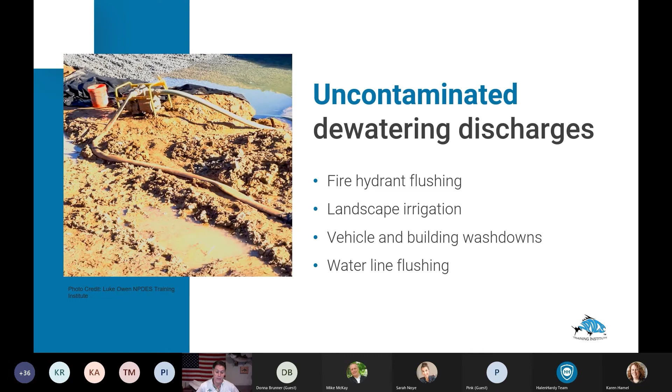So when you're flushing and when you're getting rid of that water, you need to actually make sure it is being discharged as clean water from the necessary point of discharge from that construction site. Okay, go ahead to the next slide. Thanks. Here, identify activities that create uncontaminated discharges, eliminate the detergents that might be there, use dewatering devices to capture sediment pollutants. So that's kind of a good how for sure.

Eliminating detergents. I know before I got into this stuff years ago, I had no idea that me washing my car out there on the street and putting detergent, essentially suds, in the local creek through a storm drain was a problem, but it is a serious problem. Detergents can really kill fish. And so the EPA wanted to make sure that that's specifically identified.

The next clarification that they made for the permittees are modifications to your NOI. NOI is your notice of intent, and this is basically your notification to your regulating authority saying, okay, this is what we intend to do. These are the things that we're going to do within the scope of this permit while we are in that construction phase. And there are a lot of things that we may overlook when we make changes within our facility that the EPA does need to be made aware of.

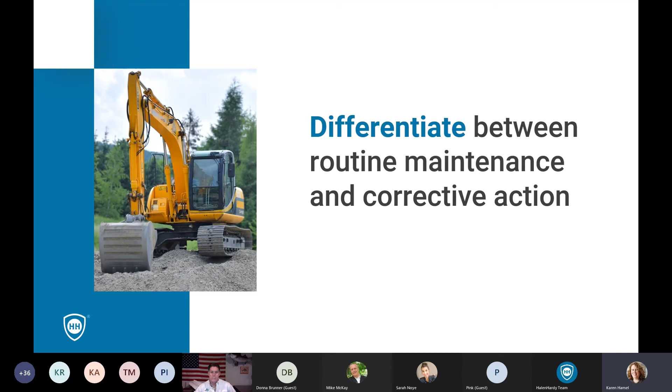And other things that we might do, trimming shrubs, or if we need to clear hedges back on a lawn, taking care of those things that we might do every day. Think about things that we would do after a construction site has been done. Those might also be activities that we would consider routine maintenance. And they're things that, as I mentioned, probably come up on an inspection and you note that something needs to be done. The EPA is also clear within this permit that routine maintenance tasks are things that traditionally take less than 24 hours to complete. So these shouldn't involve any kind of major reconstruction. You shouldn't be digging out land in order to make a routine maintenance task happen.

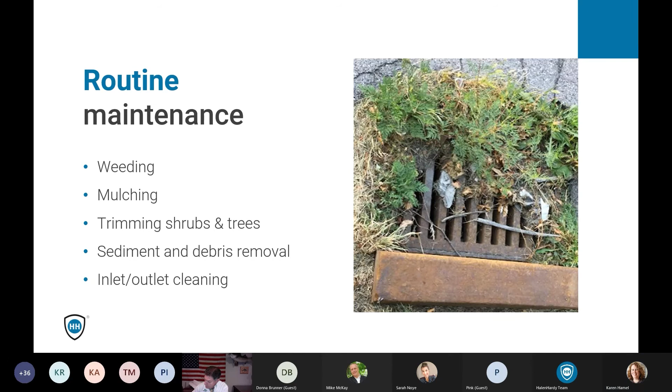And corrective actions, in converse to that, again, these are things that we're probably going to identify within the scope of an inspection, but they're things that are going to take longer to complete. So if you need to replace a perimeter barrier, if you need to maybe create a new stormwater basin, or you need to do something that is going to help prevent a discharge of any kind of a pollutant, but it's not necessarily a thing that you're going to be doing again and again, that may take you into a corrective action.

And the difference in these two is important because if you're doing routine maintenance, that's not something that you need to note on your permit. You don't need to keep a log of it. But if you are doing corrective actions, they do need to be noted in your corrections log. And that is something that you may need to update your SWPPP to reflect.

So kind of keep those things in mind and have those things within the scope of the inspectors so that they do realize those things, and if they are corrective actions, they do get logged and they do get updated within your SWPPP if they need to be.

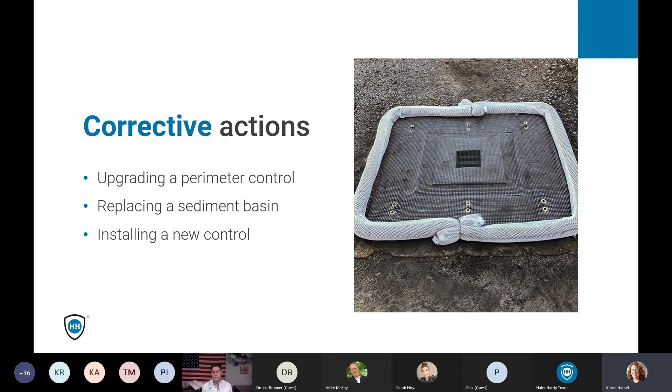So things that you can do there is, after an inspection, if you assign job tasks, put the start and end times on them so that you can verify that it is a maintenance task. It is taking less than 24 hours. Verify that tasks don't keep occurring.

So for example, maybe if you've got a barrier fence at the end of your lot and you're replacing that every week because on inspections you see that it's eroding, maybe that's no longer maintenance. Maybe that is something that you need to correct. Look for the reason why it's flooding out in that area or something, and do that corrective action once so that you're not maintaining it again and again and again every week.

And develop those processes so that when those corrective actions do happen, you do have that check and balance. Maybe you need to update inspection forms as well, but you do have those things in check so that routine maintenance and corrective actions are differentiated within your permit.

And the next item is designing your stormwater controls based on recent precipitation data. We have been going through a lot of different weather patterns, things that some of us haven't seen in a lifetime. We've seen those 100-year storms being updated more frequently. So this can affect a lot of what we're doing with our stormwater permitting.

If we're used to an area that maybe is a little more arid and storms don't come through a lot, and now suddenly we're starting to see that precipitation happening more often, or maybe the opposite is happening. Whatever those things happen to be, we need to look at that most recent data so that we are designing those stormwater controls appropriately, so that we've got a basin in place that's capable of holding everything that could come its way, so that we don't have those perimeter barriers being washed out, so that we do have all those checks and balances in place for that worst case scenario that could happen.

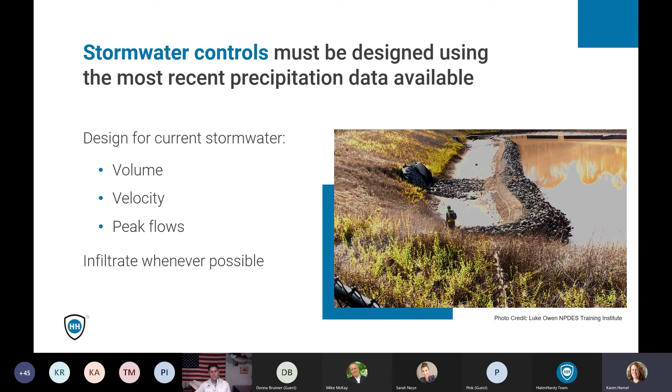And also with this, they made a point to look for ways to infiltrate water whenever possible. And that just means putting it back onto the land so that we don't have as much discharge going out, so that those areas do become more saturated with water when they need to be, and we don't have the problems associated with all of that water leaving the construction site. Some different ways to do that.

NOAA has a lot of great resources on their site, and you can actually put in your zip code to determine what your historic data is. I believe they go back close to 100 years, maybe even a little more, but they've got all of that data in place so that you can see, here's what's happened in the past 100 years in this specific zip code. So here's what I need to look for. Here's how big I need to plan that basin. Here's how big I need that secondary containment area.

Whatever that stat may be, you've got the information that you need specific to your location to make sure that everything is sized properly. And if you do need to update your plans and procedures, you've got that information to do it properly, so that as you're working with your engineering companies or your consultants, everybody kind of has the same information to play with, so that the plans do reflect reality, and so that you don't have the discharges associated with those big storm events.

And Luke, back to you.

Okay, thank you. Something to keep in mind as we're going through all of this is that around the country, wherever you're at, you have different types of rain events, snow events, things like that. Where I live right now in Georgia, we've been getting about 65 to 85 inches of rain a year. That's a lot of water hitting the ground. And a 1-inch rain event on 1 acre is equivalent to 27,154 gallons of water. So just with a 1-inch rain event.

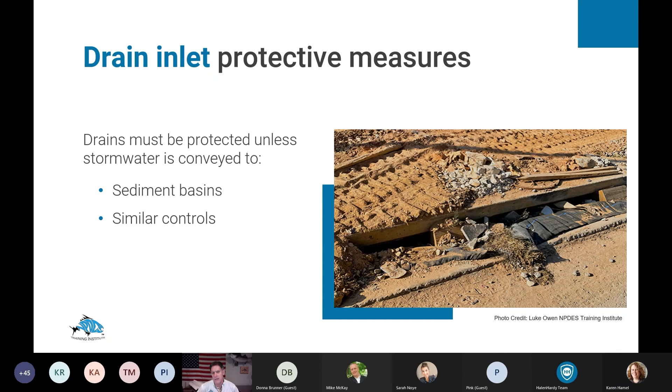So how do you do that? You identify the drains, guard the drains that don't lead to retention areas, filtration media, oil water separators if necessary. Again, oil water separators are kind of unlikely depending on the type of project or construction job you're on. But here we have a kind of a storm drain inlet that's not really for sediment. That's a post-construction sediment trap. But we have, of course, all different measures.

And every state and the feds have their own BMP guidance documents that they go to. Again, just like Karen said, the EPA is not going to recommend a specific vendor, but there are technologies that different types of vendors make for guarding storm drains. Some better than others. For inlet protection and excavated inlet protection, you're going to use different measures than you would after that pavement's poured and you've got storm drains still adjacent to open lots. So you're going to use maybe filter socks, stuff like that. So just use the appropriate BMP.

And to underscore all of this, the SWPPP, as well as the permit, are what I refer to as the Bible. You've got to do what's on them. Now, the difference between the SWPPP and the NPDES permit is this. The SWPPP has to change. It has to adjust to the challenges that site sees. So, for example, if you're getting moderate rain events and the existing BMPs are working and they match what's on the design, perfect. It's great. But when you get hammered by a great big, maybe a 3 or 4 inch rain that's still within the design capacity of that plan, you've got to change that plan to match the BMPs in the field.

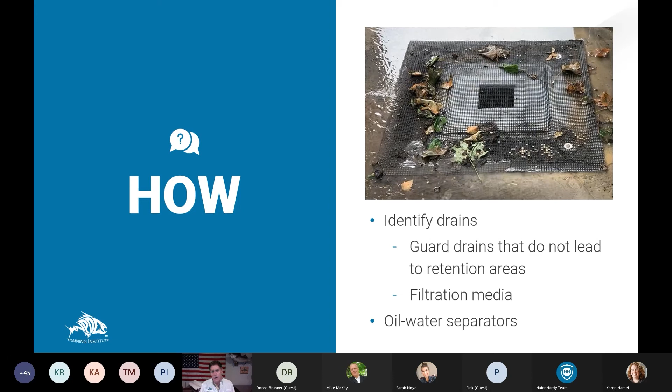And many times it takes the design professional, that professional engineer, maybe a CPESC, a certified professional in erosion and sediment control, that stamped those plans to make sure that they match what's in the field. Make sure you do that. It's a pain in the butt, but I guarantee you it is well worth your time to do that. Okay, next slide.

All right, inspections in arid and semi-arid areas. Okay, once per month and after rain events. The seasonally dry period locator tool, Karen mentioned that earlier. It's a great tool. It's super simple. It's an Excel file. You download it. You type in your state, and it'll tell you the dry months. And so really, I love this because EPA is saying, well, for the dry months, then don't worry about it so much. Just make sure your BMPs are still operational.

You have to remember your stormwater treatment system is the construction site. And in this course, what we're talking about right now, it is a stormwater treatment system. Heavy equipment, people get lazy when it's dry out there. They're forgetting that that inlet sediment trap's been run over a million times, and it's pretty important when it does rain.

Polyacrylamide that we've used to tackify those soils, well, we tackified them and we did that to keep the dust down. We've not been getting a lot of rain lately, so people are tracking over it. They're breaking up that top surface. It starts to blow again, and the next thing you know, you got complaining neighbors.

So, make sure you're always on top of your maintenance, and that is by far one of the most difficult things to do on a construction site. Just make sure those things are operational, even when it is dry. Go ahead, next slide.

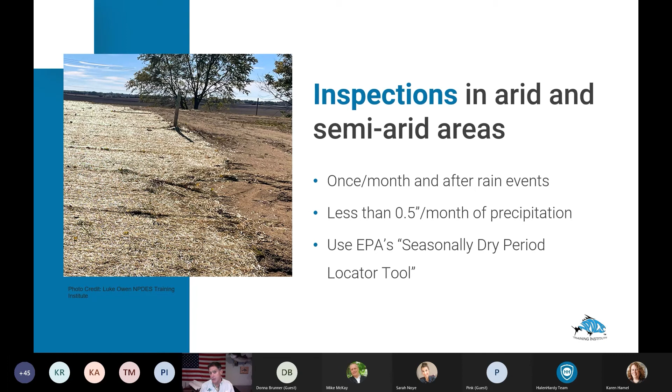Okay, and we talked about how to document which months the reduced inspection schedules apply to your operation, and develop an appropriate inspection schedule, certainly around those months. And just like Karen mentioned, we've been getting some strange weather. We're here in Georgia, I've lived here for 20 years and I've gone through 3 different droughts. We've been getting a lot more rain here lately, and we haven't seen a drought now in 8 years, something like that, which is really unusual.

So, things are changing right now. The bottom line is just be ready. Make sure, regardless of whether or not it's raining or it's dry, that your BMPs are going to be operational when they're needed. Next slide. All right, waste containers with lids must be closed.

Absolutely, and so here we have building materials and pesticides, petroleum hydrocarbons. We have other pollutants outside of sediment on site. The EPA also wants to make sure about those types of materials that don't lend themselves as a pollutant, like, let's say you had some delivery of some building tile or roofing felt or whatever the case is, those are not necessarily pollutants. They're solid and not going to really be responsible for discharging a pollutant into a local waterway.

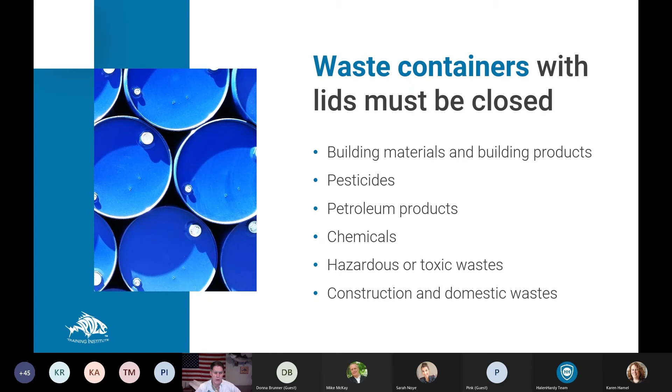But you do have other types of things, and concrete is one of them. Dry concrete, you want to make sure you break that up and put that into a waste bin. All your waste bins have to be covered up, as well as your chemical storage and stuff like that.

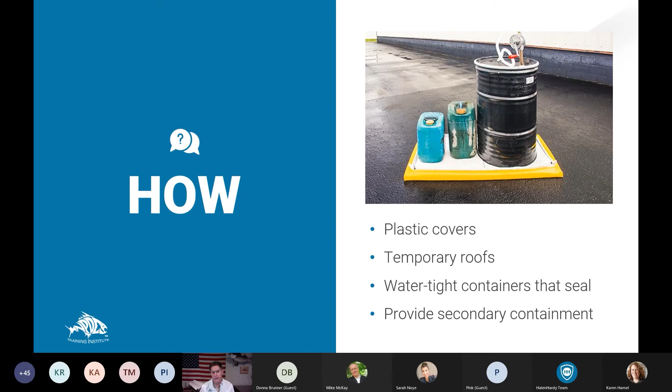Next slide. So again, plastic covers, temporary roofs, watertight containers that seal, provide that secondary containment. Again, secondary containment is the containment that would allow a spill to occur and have it not flow beyond the boundaries of your containment. So really, it just follows right along with the industrial permit requirements there. Next slide.

Handling liquid waste from applicators and containers, kind of along the same way, but we do have a lot of painters out there, drywallers. It's super easy, especially in the wet states where you have a local creek real close, or it's just easier to pressure wash that thing or put that paintbrush near a storm drain. Saw that last year, and it just goes right down the storm drain. It's not hazardous. What's the big deal? Well, it is a waste and it needs to be properly handled.

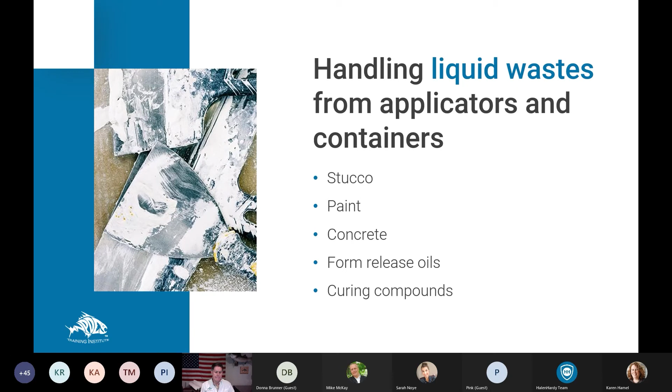And so as a general contractor, you should have areas not only for concrete washout, but for handling materials like this, curing compounds being one of those. Next slide. All right, contain the liquid waste for dewatering treatment for sure.

Dewatering, states manage that differently. I tell you what, when I moved to Georgia, I couldn't believe how they allow sites to dewater and not require testing. I came from California, and man, you couldn't sneeze on the ground without it having to be tested. So states are definitely different.

Make sure you're following local and state requirements that may not be inside of the NPDES permit. And those are great conversation pieces for regulators, for the permitting authority. And also, of course, your local regulators, if you're working under local permits.

They have more stringent requirements a lot of times than what is actually in the state permit. Sometimes they're a lot looser, but sometimes they're more stringent. So just make sure as you're going along and dealing with these types of things that you're following those ordinances and those extra requirements as well.

Locate any washout or clean out activities as far away as possible from the receiving waters. And again, having these things self-contained, not just relying on that detention pond to capture any of that waste that you're washing off into the storm drain. That's not appropriate. Next slide.

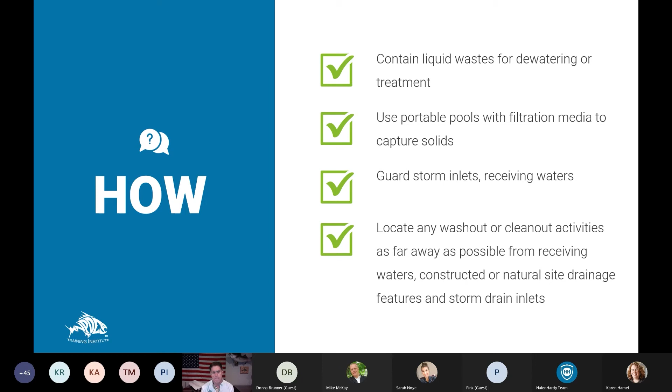And so update the SWPPP site maps when necessary. Kind of touched on that. Can't emphasize that enough. After conducting inspections, perform that routine maintenance, complete corrective actions, and maintain a log. There is a term, and I touched on it earlier, and it's referred to as being able to demonstrate your intent to comply.

When I started providing these expert witness testimony services for companies that many times had never seen a lawsuit, I was talking to a judge, and as he was sharing the synopsis of the case, essentially at the end of it, he said, I just want to see that somebody's trying to comply with their permit. I'm not here to really crack the whip on people that demonstrated their intent to comply. I'm here to make people accountable for when they didn't.

There's a lot of latitude and forgiveness in the legal community for the most part for NPDES compliance. Of course, we're always responsible for the property damage, regardless of how much we can demonstrate our intent to comply. But that certainly has a huge role to play in how much you may end up being accountable for, if you can demonstrate that you're really trying.

And so updating that SWPPP, making sure that the best management practices, that when it rained on that site or you received a big wind event or whatever, that you definitely indicate through your documentation, making sure your inspection reports match what's in the permit is super important.

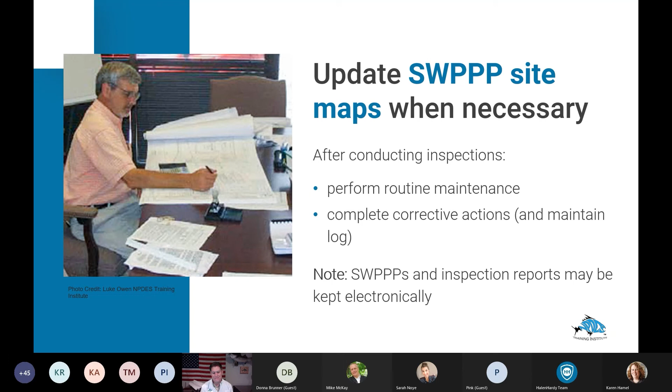So here we want to take a break before we go into the parts of the permit that are more specific for any questions that have come in. Sarah, do we have any at this time? I do not see any. I don't know if you want to give a couple seconds here for anybody to type. I'll give them a couple seconds.

Might be a time to ask, I get to talking too fast because I want to make sure that we're not going to be diving in beyond your hour. I know Karen's really conscious of that as well. So if I'm talking too fast, please say something. And if you need me to repeat something that I've already said, then please put a comment in there. Sarah, is there anything? If not, we'll keep going. Nope, you're good to go. All right, we'll save them to the end then.

So now we're moving into some of the additions to the permit. And what I found interesting with a lot of these, I come from more of the industrial background, and a lot of the things that they added to this construction permit were very familiar to me from the industrial permit. And the EPA did note that they did look at the industrial permit as well as some of the new RCRA generator requirements when they were looking at these more specific requirements.

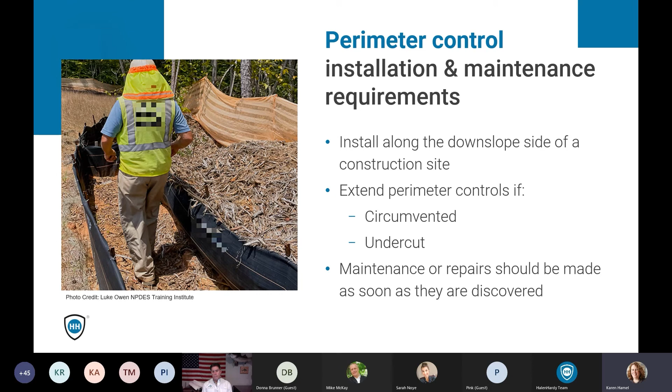So that is something that with this new permit, they are looking at a little more stringently and having those repairs in place sooner rather than later. So check those controls with your inspections and make sure that the criteria is on there so that people know what they're looking for, so that the inspectors do have that clear picture of what a circumvention looks like, what an undercut looks like, and they know kind of what they need to do in order to fix those situations.

The next area, and this is something that built upon those clarifications, and again, something that actually came from the industrial permit, really looking at controlling the chemicals and things that you have on site that are necessary for your production. So this could be the diesel fuel to power your engines. This could be oil to lubricate parts.

This could be pesticides, whatever those things are that are on site that we need in order to get the job done. But they're not the soil, they're not the pile of rock, they're not those things that we traditionally associate with those construction activities. Again, making sure that containers are sealed, making sure that you've got them contained.

One thing that I thought was really, really interesting within this regulation is, to my knowledge, and I've been doing this for about 30 years now, this is the first time that the EPA specifically says you need a spill kit. Traditionally, up until this point, they have always said that you need to be prepared for spills, but they've left it up to the site's interpretation of how they want to be prepared for it. This is actually the first mention that I'm aware of where they say you need a spill kit.

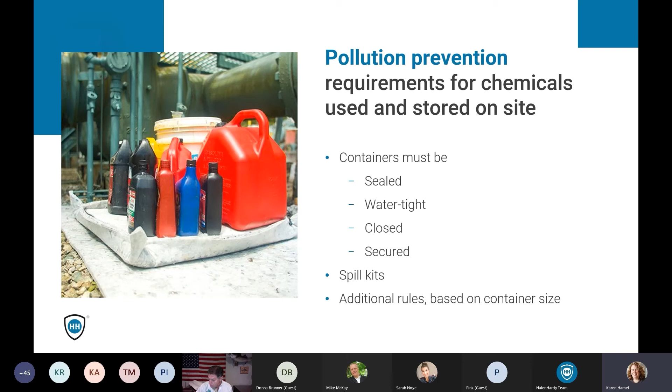So that was kind of interesting language that they added into this permit to specify that you've got to be prepared for spills in this manner. And they also added a lot of different information on your requirements based on how much you're storing on site. So if you've got small containers on site, you need to have that spill kit. You need to keep those containers covered and closed.

If you've got 55 gallons or more, so that would be your traditional 55-gallon drums, any tanks that you have on site, you also need to provide secondary containment for that. So kind of looking into a little more of what we're looking for with SPCC plans. And if you've got an SPCC plan, they also note that whatever you're doing for SPCC would also satisfy the requirements for your SWPPP and for your permit.

So look at those and look as to whether or not you do need to have that SPCC plan in place as well. That would be probably very large construction sites where you've got more than 1,320 gallons of oil or petroleum products on site. So maybe not those smaller projects where you've got an acre or two and you've got that little 500-gallon tank of fuel. But look to see if those other regulations do need to be in place and if you do need to comply with them as well.

So things that you can do here: conduct your trainings. Make sure that after you do put those spill kits in place, people know how to use them. Also teach people to keep those containers closed. And that's something that kind of stems from that RCRA requirement. If you do have an industrial facility, if you're more used to kind of those permits, keeping those containers closed is very important, because if the container is tipped over, if there's a rain event, those liquids aren't getting out and getting into the environment.

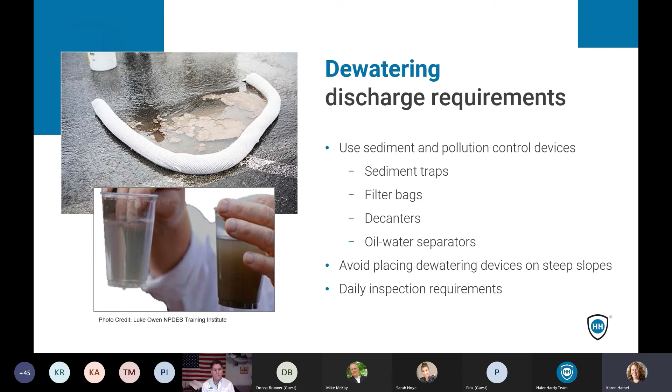So Luke has a great picture here of two different discharges, and one obviously is clearer than the other. We want to go for as much clarity as we can within those dewatering events, and make sure that you've got those BMPs in place. You are doing whatever you can when you are dewatering, and you are taking the pictures and everything you need. That was another thing that they added, was that you need to add pictures to your dewatering inspections. So taking that before the operations start, taking a picture afterwards, making sure that you don't have sedimentation building up, making sure that you don't have a lot of turbidity in that water after the dewatering events occur. Checking for plumes, ways to do it.

Add these things to inspection checklists, because even though inspectors do need to be trained, and we'll talk a little bit more about that, anybody who's conducting an inspection does have to go through training, but if you're 2 or 3 years into a permit cycle, it can be a little difficult to remember everything that you need to check for. So have those things on inspection forms when you do have dewatering operations, so that inspector is reminded of exactly what they're looking for. Are they looking for plumes? Are they looking for sheens that might form? All of those things on an inspection form help that inspector to really check those boxes and make sure that they aren't discharging unintentionally.

And Luke, back to you. Okay, great. So here we go.

We're talking about training requirements, but before we get into that, I wanted to talk about this stormwater treatment system we're calling a construction site. With any type of pollutant, whether it's an industrial pollutant on an industrial facility where they have outside storage of chemicals, or a construction site, you always want to contain the pollutant as close to the source as possible.

So when you have an open 20-acre site, for example, where all the vegetation's been taken off, you now have a graded site. Well, you want to contain that sediment as close to the source as possible by using preventative measures, being erosion prevention measures, and that's ground cover. And again, for arid areas, that would be the use of polyacrylamide, anionic polyacrylamide, which is much more environmentally non-toxic and safe. Always prevent that erosion first in your mind.

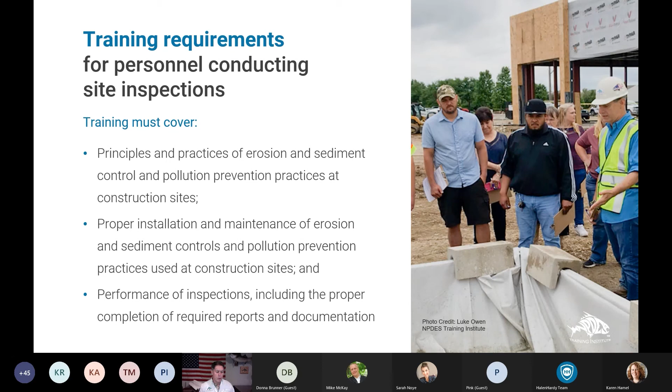So, for example, if you have a detention pond on the stormwater pollution prevention plan to contain 5 acres, and yet, for lack of room during this particular phase, the superintendent decides to minimize that size to maybe a 2-acre drainage area, ooh, that's a problem. The training helps people understand that when you look at sediment storage on a designed construction site, there are calculations that went into that, so you can't just randomly change those things in the field, even though it's helping your project move along. You have to make sure your design professional is on top of those as well. So principles and practices of erosion and sediment control, absolutely. Okay, go ahead, next slide.

Review current training, update, maintain training. Okay, so along with that, and Karen discussed it a little bit, and I touched on it earlier, make sure that your inspection forms, first of all, are something that your permitting authority would smile upon. Some states are better than others. Some states don't really come up with inspection forms that they know would comply with the permit. Others are better at that.

But you need to understand what the inspection requirements are. Make sure you include those on your inspection report. Don't just include the best management practices and how they are during your inspection, and if there's a deficiency, or if it's a violation. Those are things I've seen on all inspection forms. But what I don't see oftentimes is the NPDES permit requirement for frequency of inspection. So know the difference between deficiencies and violations, and your inspection reports absolutely help you do that. Go ahead, next slide.

Documenting signs of sedimentation related to construction site discharges. Yeah. The deposits, the floating media, oil sheen, foam, color, odor. A lot of those, like oil sheen, foam, odor, are taken from the industrial permit. But certainly if there's chemicals that have been discharged to a waterway, you want to take note of that. When you see offsite discharges, this is what you do when you've been hit by a big rain event and you know full well there's nobody in the world that could have kept that sediment out of that creek, or from going off site, or from overwhelming that detention pond.

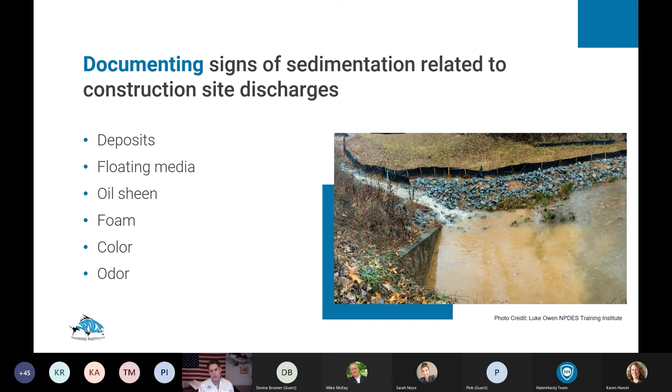Go ahead. Next slide. So again, reviewing inspection forms and documents, making sure those forms are meeting the requirements. Pictorial examples. Don't be afraid of taking pictures. Be afraid of taking pictures with something in the background you don't want to have a picture taken of. That happened one time years back. But take photographs of the damage that this last rain event or this storm event caused, and then take a picture of what you did to fix it, and make sure they're time date stamped.

That is golden. I mean, any regulator that I've ever worked with looks at that like, man, that's awesome. And in the court cases that I've been involved with, or these legal cases, very few of them go to court. But they really do a lot of good to show your intent to comply, that type of thing. Take pictures during inspections to document, look for changes over time. Absolutely. Next slide.

Okay, so photo documentation of site stabilization. Here, this is something different. And I've noticed this actually over the last few years, people voluntarily doing this, that take a photograph, a drone shot of that site when it's stabilized. The federal requirement of 100% cover with a density of 70% is kind of a confusing thing for many people.

But here you have in this photograph a construction site in the background, and you have a lot of building materials that are stockpiled on that parking lot. But let's say that the building materials and whatnot are not stockpiled there, and they just paved it. Well, that's 100% cover with a density of 100% of ground cover. You're not going to get any erosion underneath that.

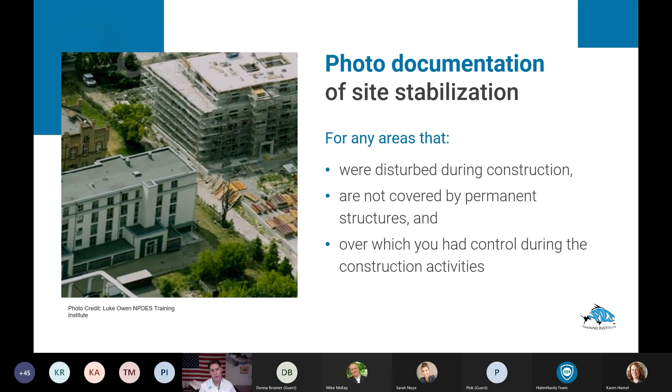That's something I didn't see here, but a really important part of permit compliance is not just walking away with that silt fence up, not just walking away with your inlet sediment traps still in the road. You've got to remove all that stuff. And if they cause damage later on, then you're liable for it. So remove all that stuff after you've stabilized your soils. Go ahead. This is the how.

So take before and after photographs, date each photograph, time date stamps, super important. Ensure those photos are clear and in focus. It's super important. And if you video, make sure you're not taking them like grandma used to take them back in the day, you know? So you want to make sure that they're nice and steady, even pan, and that you're speaking succinctly and to the point of what that video is showing.

Same thing if you actually record what's going on with your drone shot. Be very succinct, just like your inspection records. Short and to the point, not a lot of abstract thought and stuff like that. You just want to show your permit compliance. Next slide.

All right, so the NOI questions. Will the operator be discharging dewatering water during the course of their permit coverage? Is the operator's discharge from a current or former federal or state remediation site? Well, if you happen to have like a brownfield site or a site that was formerly contaminated, when they left there, that contamination's gone. If it's like a Superfund site or a brownfield site, you know that they've addressed those issues.

But the sediment, there is a chance that some of that sediment could still have some of that pollutant in there. Just make sure that that's addressed. You should know that before you even bought the property, actually, or started working on that property. Are there other operators who are also covered under the construction general permit at the same site? And if so, what are their NPDES ID numbers?

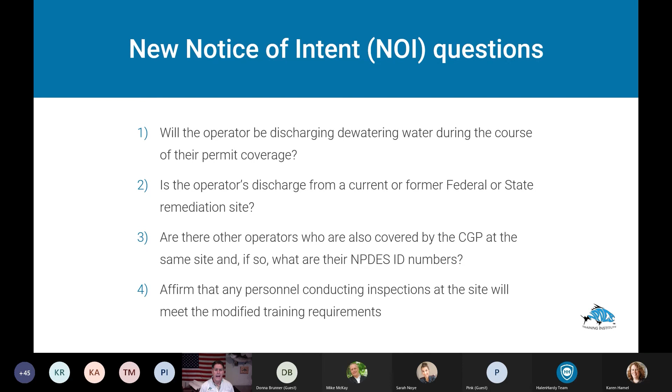You know, if you are taking courses, that the online courses or the in-classroom courses are provided to actually show you what that permit requires. Not just what another state's permit requires, but what that permit requires. And then also the BMPs, the best management practices, how they need to be installed and maintained. Next slide.

Luke's presentation will also help with that as well. So just a resource for all of you to have as you're going through your NOIs and as you're developing or reviewing your SWPPPs. You can use this to kind of gauge whether or not you do need to add these things to your SWPPP and to your NOI. And that will, again, be available.

Luke, final thoughts from you. Luke, you're muted. There you go. My dog was barking, so I had to shut him up.